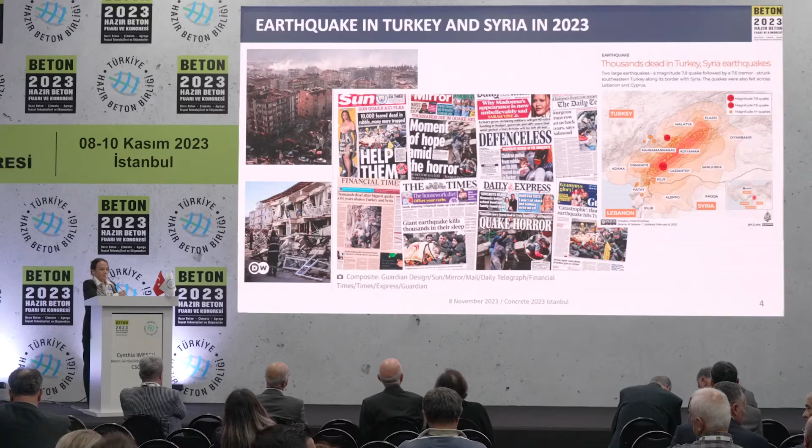While traveling here to Istanbul, I was wondering if my building was solid enough in case there was an earthquake. So it's up to the general public as well to ask, where does the concrete come from? Is it sustainable, physically sustainable enough?

And throughout the sustainable development goals, companies started to discuss a lot how they can improve and help achieve the sustainable development goals. Corporates have a big responsibility, also in the concrete sector. That is why

in 2016, the Concrete Sustainability Council was developed and adopted with the World Business Council for Sustainable Development, many NGOs, and civil societies. We decided to come together from all parts of the globe to try to support the implementation of the Sustainable Development Goals in the concrete sector. So it's not just one company or one NGO, it's really an effort from the whole globe, trying to meet together, be stronger together, and launch the certification, which we didn't have in this sector.

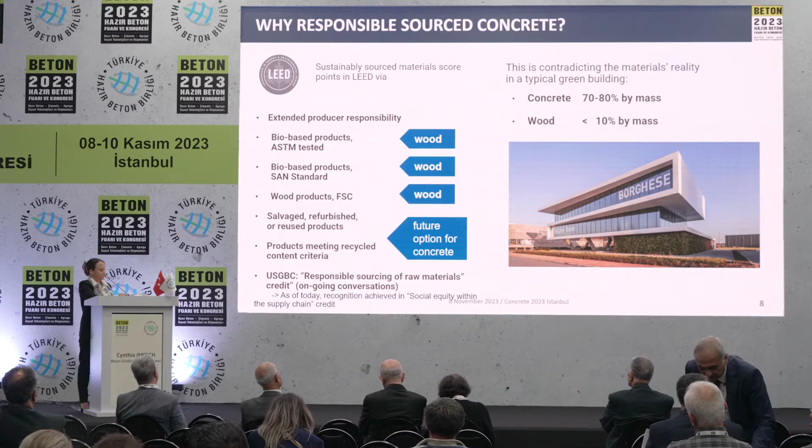What is the Concrete Sustainability Council? We are in 21 countries. We have 27 members. There are 843 active CSC certificates around the globe. There are 4 different levels that you can achieve. And this has been quite a steady growth since 2016, and we're confident it's going to continue growing in the upcoming years.

What are the typical things that we assess for a company? The company has to go through a deep assessment, to see if they have fair practices in business and compliance, as well as excellence in occupational health and safety. If they're using circularity and water in a responsible manner, and enhancing responsibility in the supply chain. Biodiversity as well, we're checking. And this is very important to know: where is the origin of the concrete you're using? Where does it come from?

How does the certification process work? You have the global system operator, which I'm representing today, which is based in Switzerland, but we have regional system operators across the globe. The regional system operator manages the CSC certification in the different regions or countries. Here it is our colleagues from the Turkish Ready Mix Concrete Association. Then the certification body, the auditor, validates the points and issues the certificates. The customer just has to provide the evidence requested to get a certificate.

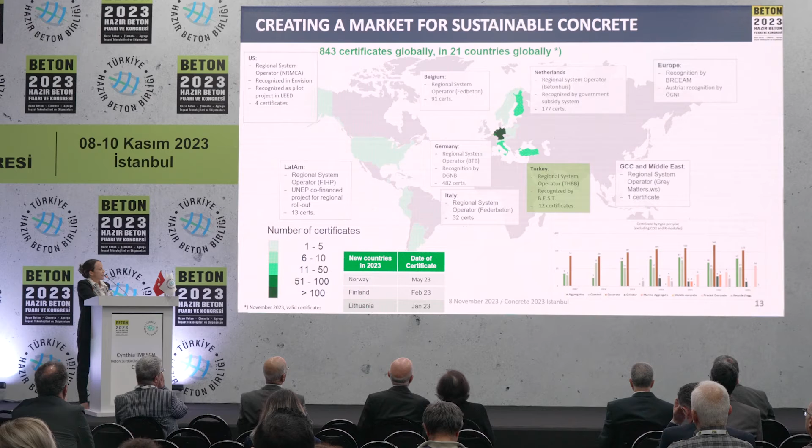And we're recognized by green building labels as well, which is quite key for us. As you will see, we're recognized by BREEAM, DGNB, ÖGNI, Austria, Envision, LEED, and here in Turkey by B.E.S.T.. Here is a picture of our latest General Assembly, which took place in Berlin, with our regional system operators from the different countries.

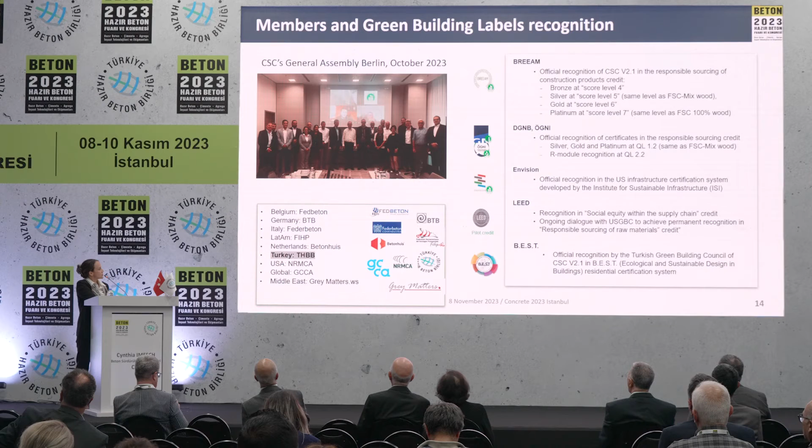We're also present in the US and in Latin America, where we had support from the United Nations One Planet project to fight against informality as well. So we're growing in the region too. And here you can see where we're recognized by LEED and the social credits.

For more information, you can directly access the website turkeycsc.eco, which is in Turkish, easier for everyone here, and you have all the detailed information on how to get the certification. This is a bit more detail on how you can earn points if you have a building made out of certified CSC concrete.

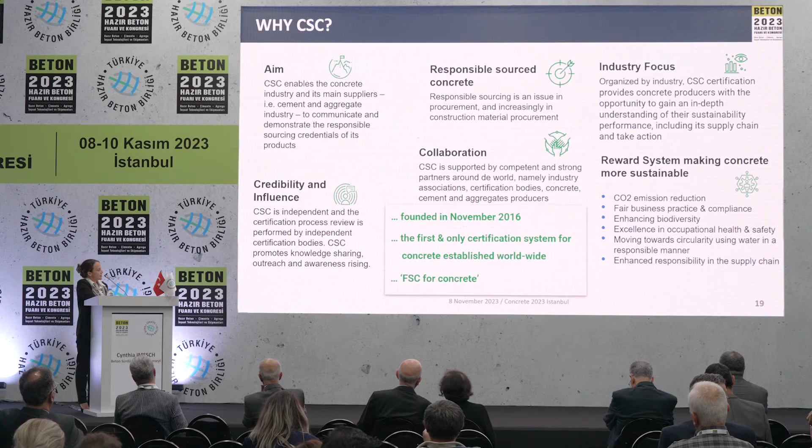Then why CSC: it is very important that the concrete industry and its main suppliers communicate and demonstrate responsible sourcing, that it's transparent. I don't know if it's known here in Turkey, but FSC for wood is very famous everywhere, and we're actually doing the FSC for concrete with the CSC, and it's the first and only certification system for concrete established worldwide.

And as we saw, it's very important that we work together globally and not just individually, because it brings more weight into the sector if we're all working together.

My predecessor just discussed the circular economy. So we want to get out of this linear model of take, use, and throw away, and really recycle. And we're really happy and proud to see around the world a lot of initiatives taking place, such as the predecessor presented, where you can actually capture a lot of CO2 and recycle a lot of material. And I think following the tragic events in Turkey, there's a lot of material that could probably be recycled and reused instead of retaken from the ground.

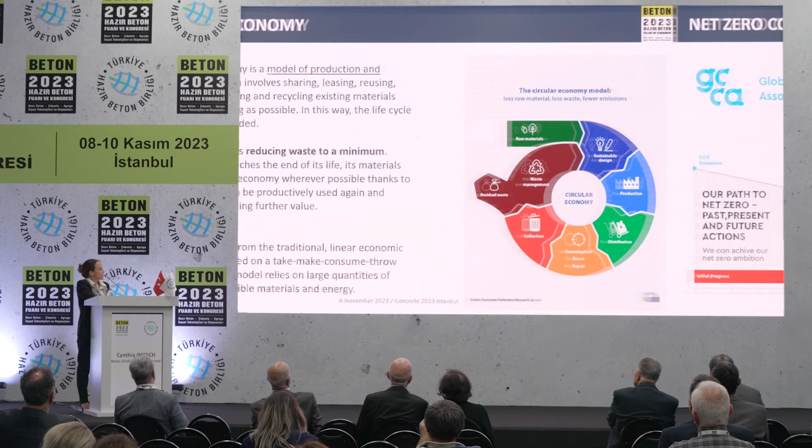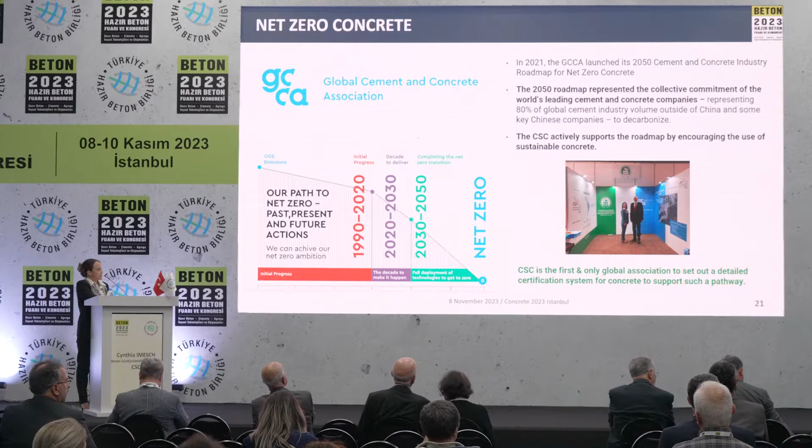The Global Cement and Concrete Association has a roadmap for net zero concrete from here to 2050, and they launched this in 2021. So they're quite optimistic about it. Most probably you've heard about it. And we, with the CSC, are really supporting this to try to achieve ideally net zero emissions by 2050.

I'm speeding up because I know everybody's waiting for the awards, but I want to make sure that you get the most important messages. Here you can see how getting to net zero is not only in the hands of the concrete producers, but also of designers. Designers and architects also have a big role to play, and they can ask to have certified CSC concrete. So in Germany, the Netherlands or Belgium, designers ask, when they do their plans, to have certified CSC concrete, maybe silver level.

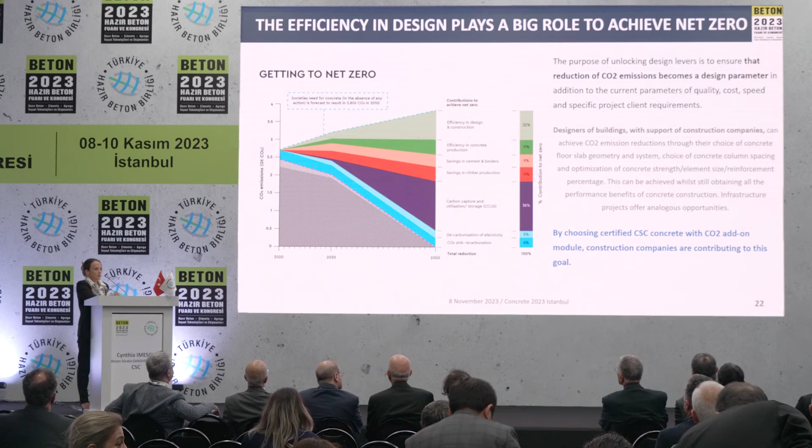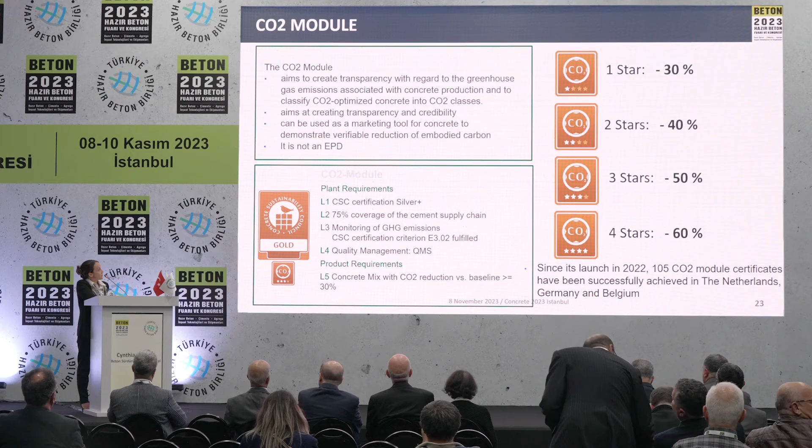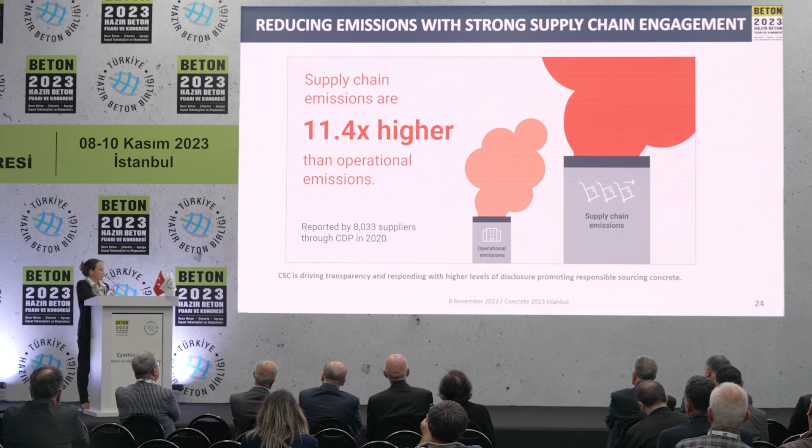So the supply chain emissions are 11.4 times higher than operational emissions. So CSC is helping to drive transparency and responding with higher levels of disclosure, promoting responsibly sourced concrete. And here you have the R module. So we will also reward companies that use recycled material, and it's also important.

Ideally, in the future, we want to achieve the 5 stars, which would imply a building made out of 100% recycled material, which is kind of a big target, but we're there with 4 stars, 3 stars, and a lot of countries are asking for this possibility because it's their requirement to have governmental buildings made out of at least 40% or 20% recycled materials. So governments and countries are pushing to have more recycled material.

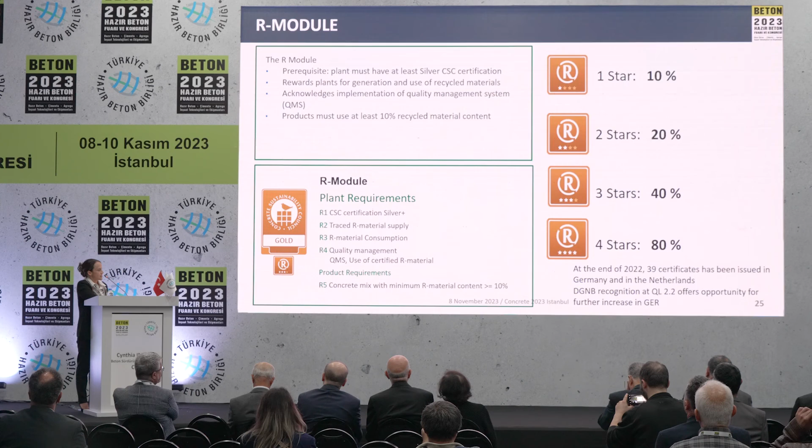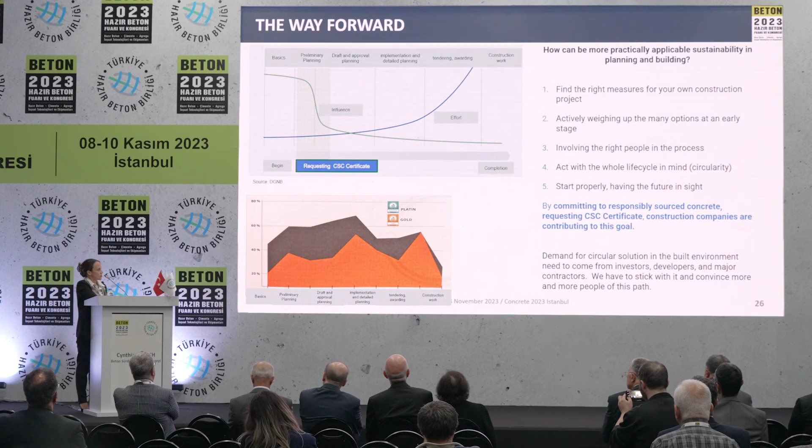How can you ask for this? So I was telling you that you can commit to responsibly sourced concrete; by requesting the CSC certificate, construction companies are contributing to this goal. And what are the main conclusions? What I want you to remember is that the effort has to be global. If every country starts having its own certification, it's difficult to understand how to measure the different certifications.

And as we saw, the construction sector has a key responsibility to protect humanity from major disasters that will unfortunately continue to come with climate change. So the CSC certification is a way of measuring and making sure that the source is sustainable. The CO2 module and R module add-ons are also key for the next generations of concrete. So I hope you will join our efforts in making sustainable concrete available for the future of humanity.

And this is the type of images we want to see, positive images, not destroyed buildings that have collapsed, but green, sustainable concrete and happy people living in those constructions.